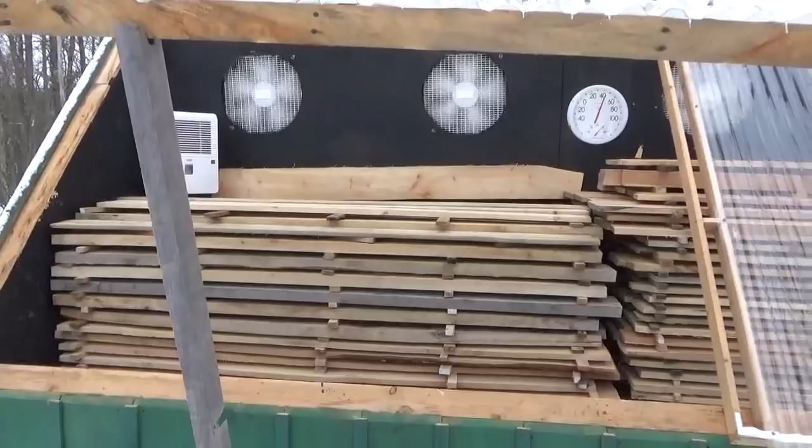Now the side that I have open here, this was maple. It still is maple, but I mean it's maple that was sitting outside all summer last year, and the moisture content of it was about 19% for the longest time. So we're going to check and see what it is right now.

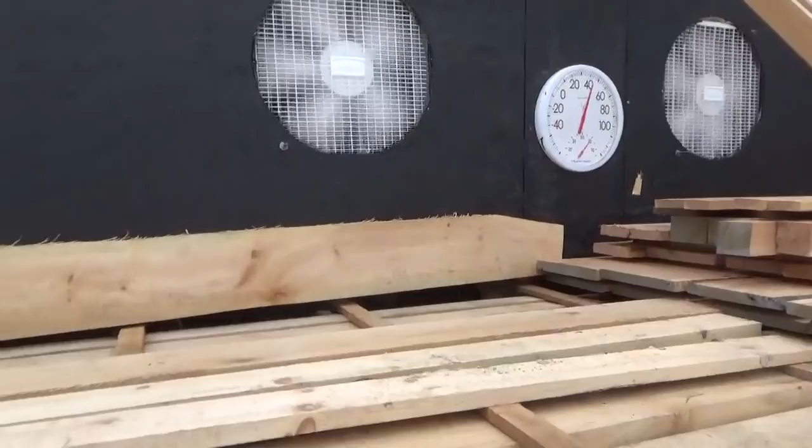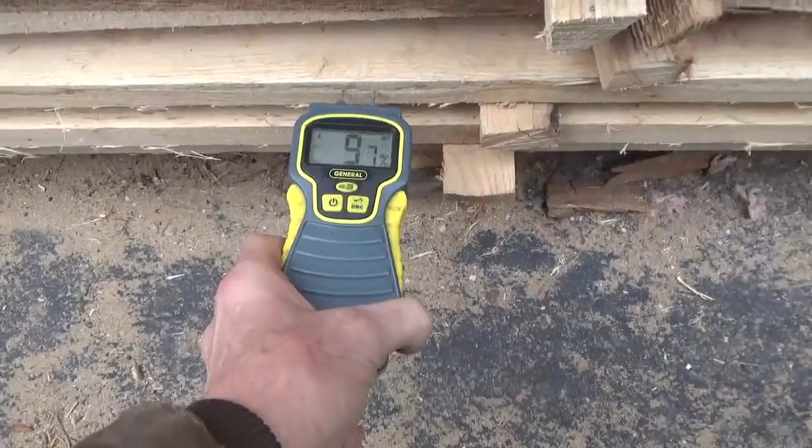So I'm starting about halfway down the pile. You're looking 11% there, 12%. 9%, and this is all maple. 11, 10%, 11%. This is pine, 2 pine boards that I put up here. It's 13%. Some red oak down at the bottom here, 9%. So the kiln has done very well holding its own, despite the cooler temperatures in here.

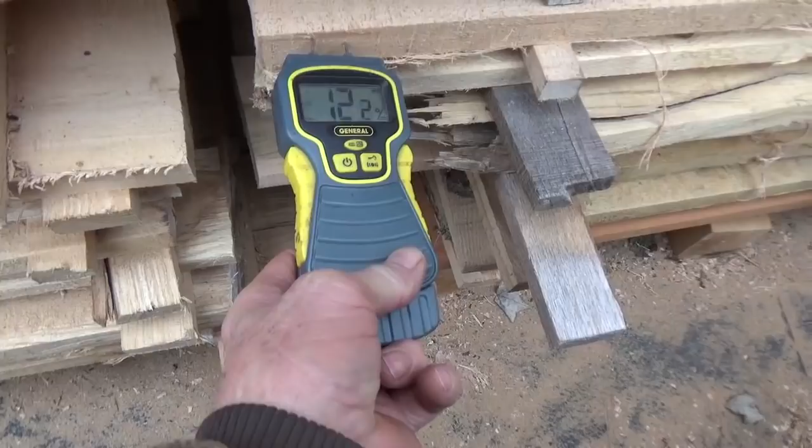I want to check some of this stuff on this side. This is cherry. Yeah, we'll go down near the bottom here. The cherry's around 10. 9. 12%. 8% for the hardwood part of the cherry, or the heartwood, 11%.

So you can see that even though the temperature is not that warm and the relative humidity there is claiming to be really high, and it is probably that just because the temperature is allowing for less moisture. The moisture is being compressed inside of the cold temperature, and that's why it's reading such a high relative humidity. But anyway, the lumber is still drying good. I have nothing to worry about here.

I would say that as far as it going all the way down to 7% or 6%, which is where I would like it to be, it's probably going to hang in there somewhere between 8 to 12, until I can get some really warm temperatures in there. That's the biggest problem right now. So right at this point, I'm just maintaining what I've got here.

So if you're into building yourself a solar kiln, however you build it, it doesn't have to be like this naturally, but make sure you leave yourself room to get in at your wood, because otherwise you're just killing yourself trying to load it. But yeah, if you're into building a kiln for yourself, these do work very well. They're on the, I think it's Virginia Tech website. You can get some information on this thing, and they really work good. And as far as I'm concerned, it was well worth the effort.

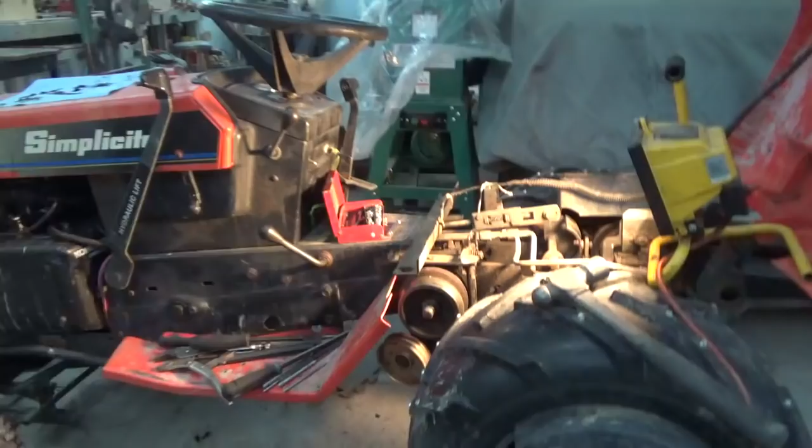Hey YouTube. So, it's always something. This Simplicity tractor, which seemed to have been running so well, all of a sudden started crunching and grinding, and I took the bevel gearbox cover off, and there's a whole pile of metal filings in there, which I think are gear teeth. But anyway, I'm making this video just for myself, if nothing else.

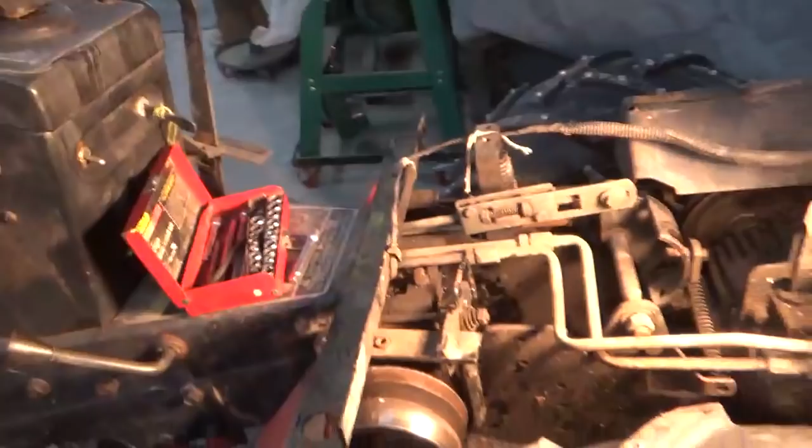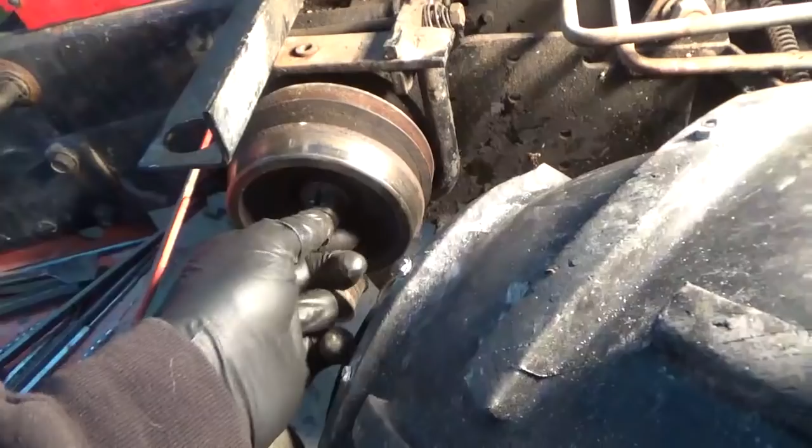On this adjustment to get the thing to engage, I took one nut off of here. There's another nut and a spring. I want to see if I can't pull these pulleys off this shaft so I know what's holding this shaft. There was a keyway in here I took out. There was also a round ring.

There it is right there. That was helping to hold on the pulleys. So at this point I'm just trying to see if this whole pulley mechanism will come off of here. I don't know if it will or not.

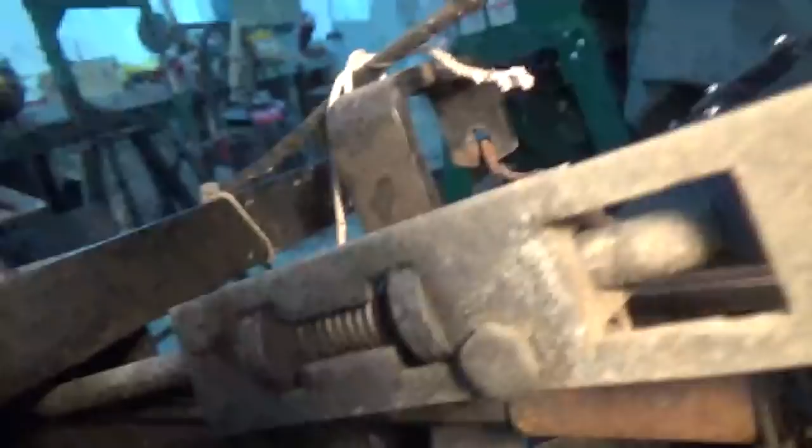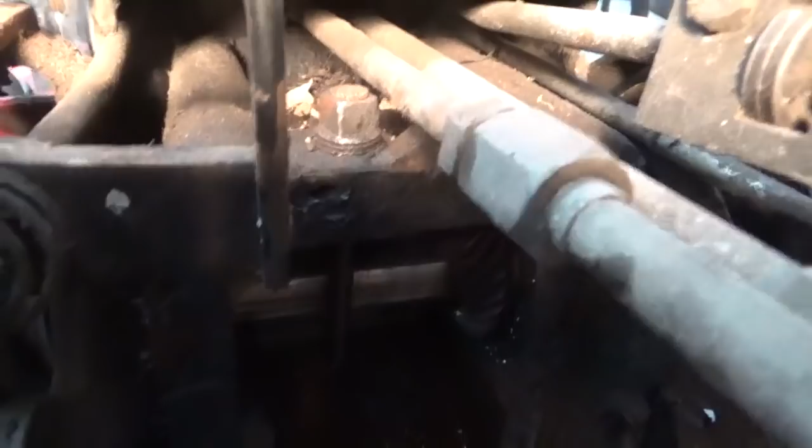So I don't know if you can see down into that gearbox too well. You can see there's a gear on this side. I don't think there's any on the other side, but there's like one in the front there, sort of like a pinion gear, and I think that's the one that's all messed up. So I got to take this apart and look at it. I can't tell anything from the way it is here.

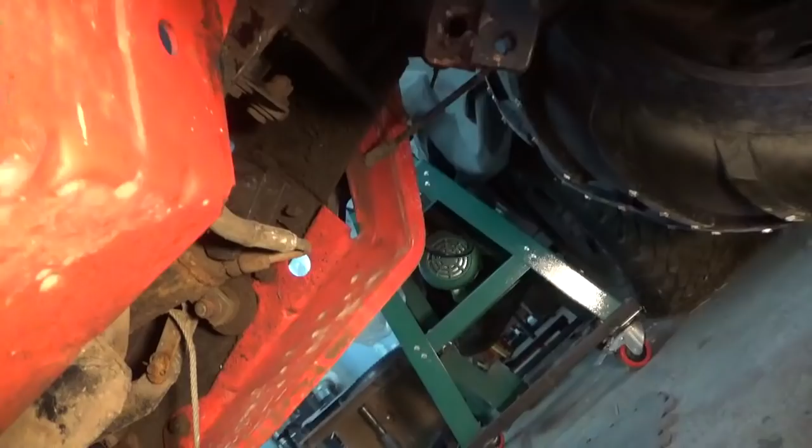So the next thing I did was I took this bolt out of here that goes from the bottom of the tractor there onto this tab that's on like an angle. I don't know why it's on an angle, I guess to divert the belt to a different direction, but either way I need to get this pulley off of here, so I'm trying to see how that happens.

From what I can tell, it looks like if I take this nut here off, I should be able to get that off of there. I'm not certain of that, but that's where I'm headed next.

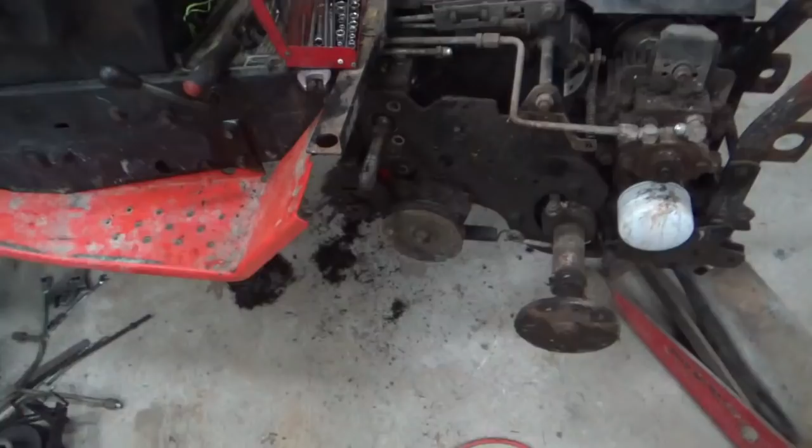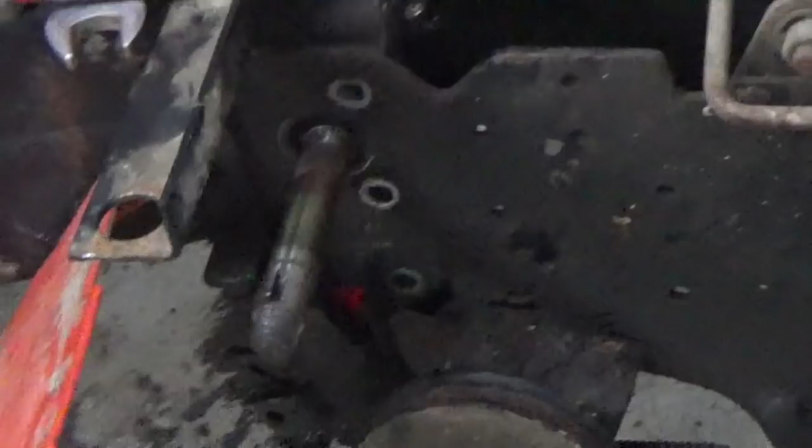Okay, well here's the status. I had to take the weight and the tire off of this side in order to get this. It's kind of like a clutch type of thing. It turns like an old style clutch and a yoke, and it pushes the gear into a brake lining to make the gear spin. But that all had to come off that shaft, and I took 3 bolts, 1, 2, 3, out of the cover there, and it looks like it's coming loose.

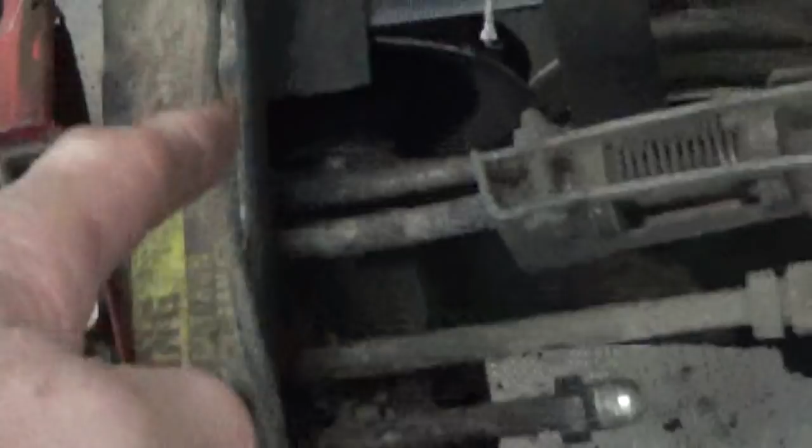I have to take the little drive shaft off that comes back there to that bevel gearbox, and then on the opposite side there I need to take this pulley off of here. I'm going to take this cover off because I think I can get at the belt that drives that pulley on this side that I need to take off. So I'll take that off of there and then see what I can do with that belt, and then I want to get that pulley off the other side.

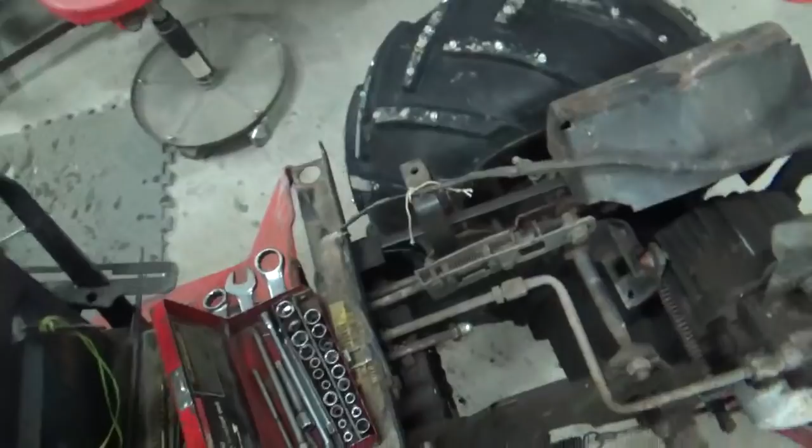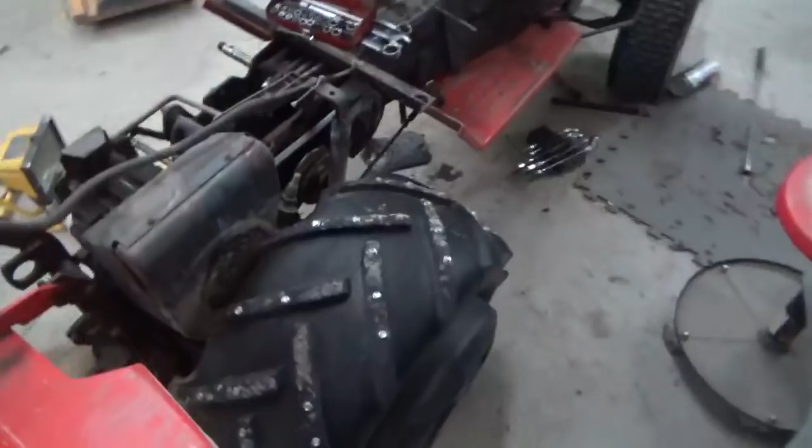It's not something like I'm used to working on, but nonetheless, you start taking bolts out and you'll find out what comes apart. Not sure if I'm doing this the right way yet, but this is how I'm going to do it. So, you live and learn. I want to take this off like I said and then go from there.

I'll tell you what guys, you ought to try and get your stuff in as good a shape as you can get it, especially once you hit your early 60s, I would say, at least for my case. The best thing you can do is have stuff fixed up and treat it good so you don't have to be doing this kind of work. Right now my leg is killing me trying to work underneath this thing and work around it. But you know, it's just something that has to be done, so you do it.

But what I'm saying is that's part of the reason why I bought this truck and leave it sit, so that when the time comes I don't have to do nothing to drive it when I get to my older age, when the other trucks maybe need some work. So I'm just hoping that works out for me, my little plan.

But anyway, I'll be working on this probably tomorrow now, so I'm not going to be doing nothing else with it tonight. I took that cover off over there, and that's it for now.

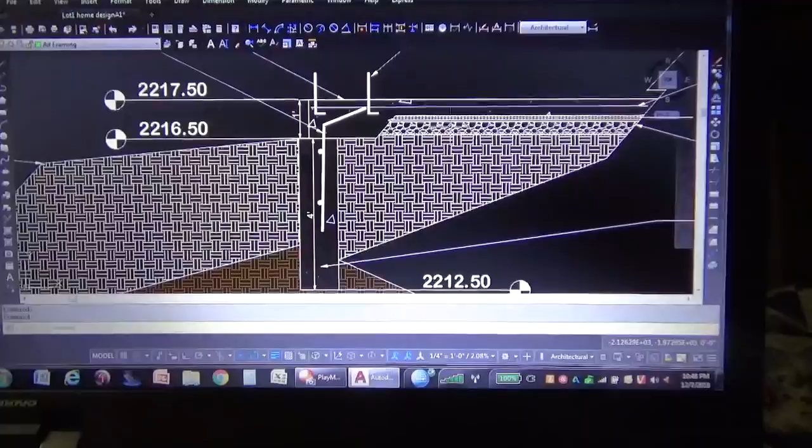So what you're looking at here, this area here represents the drawing symbols for dirt. Now this up in here is stone, and then this represents insulation. So now this doesn't show the insulation coming down here and meeting this, but that's what it did do. And then like I said, we would put insulation in the front of this concrete to seal that.

But I had been asked a couple of questions and I want to answer them. This is the concrete. This little triangle and the specks you see there represent concrete.

Now there is, some people call it visqueen, some people call it plastic, but 6 mil plastic runs here, down, and to the form board. Okay, and the form board would actually be, let's see here, right here is where the form board would be. So this is all concrete in here.

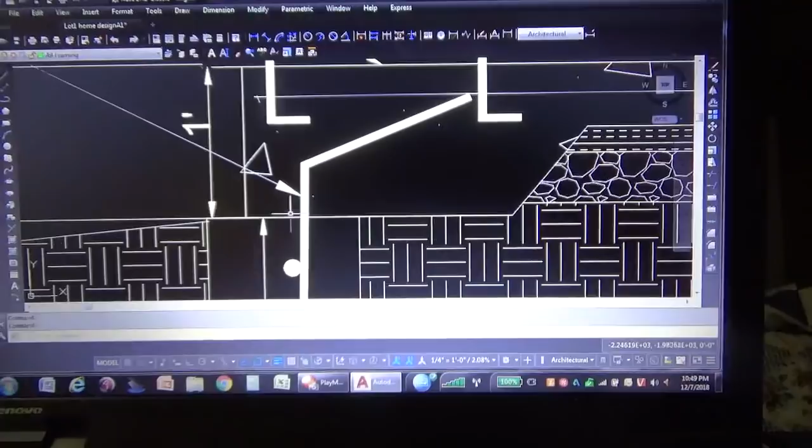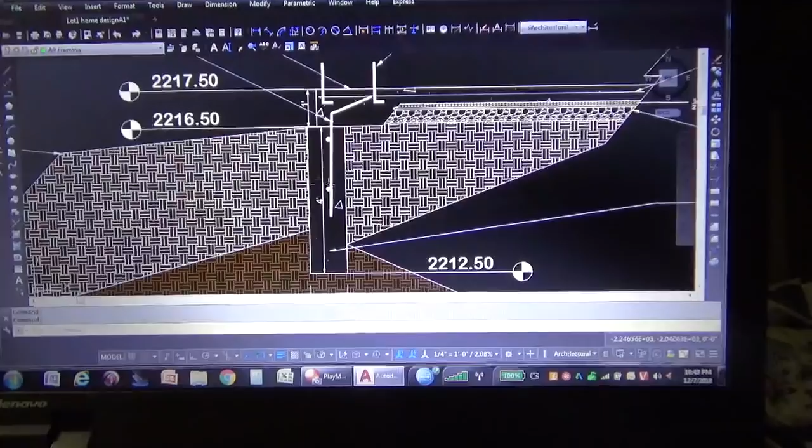Now, if you remember, I had said that down in the foundation where the concrete is, in the foundation wall, I also had rebar. Now this rebar doesn't show it, but this actually extended down and was driven into the ground to help hold it there. And then these bars were tied horizontally across from one bar linking to the other. That's what you're seeing there with this small bar.

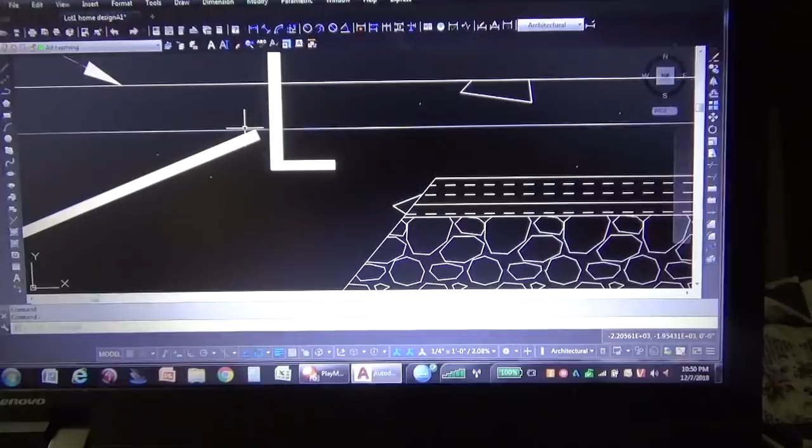So what I did with these is I left these stick up far enough so that they could be bent and hit the 10 gauge mesh, which is right here, and then this mesh was welded to these rebar, or you can tie the mesh to it. It doesn't really matter. I welded it because I was doing some welding that day for something and I had the welder on the truck, so I just used it.

Also, this represents the anchor bolts. After you pour the concrete, you can put the anchor bolts in, and you want to measure and try and get the anchor bolts so they're not going to be in the center of studs or window jacks, or in door jambs. You don't want that. But anyway, this would represent the anchor bolt.

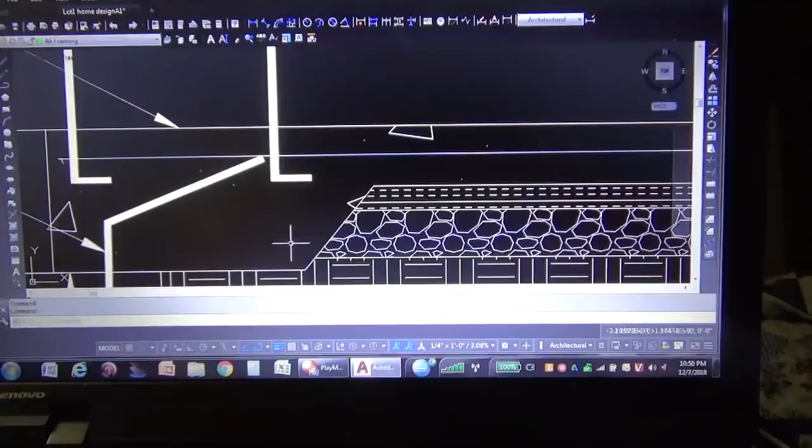So the insulation would come over, down. There would be plastic on top of the insulation, okay, and then you pour the concrete. And it's important that this mesh come across this gap here. This concrete is weakest right at this point here, okay, and if you don't have a good compacted fill underneath that and compacted stone, you could end up with a crack here.

Now I have never had any cracks in the floor along this edge, and that's mainly because it's been compacted so hard. Because once you compact this soil and you dig this up here, the only place you may have a little bit of breakout with the soil is right in these corners as you're pulling the bucket out loaded with dirt.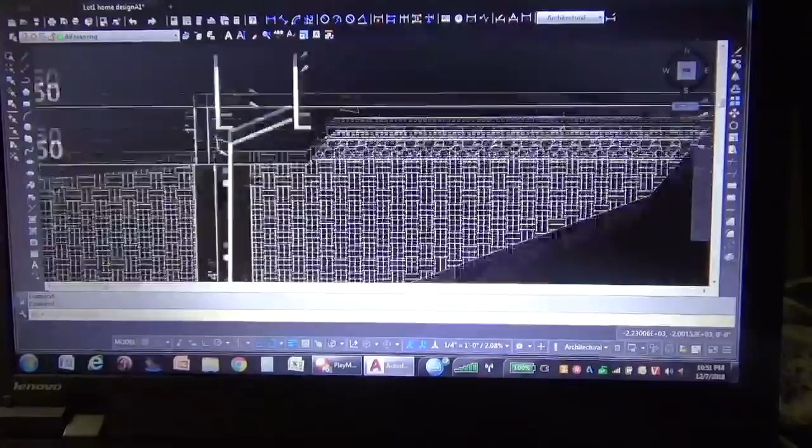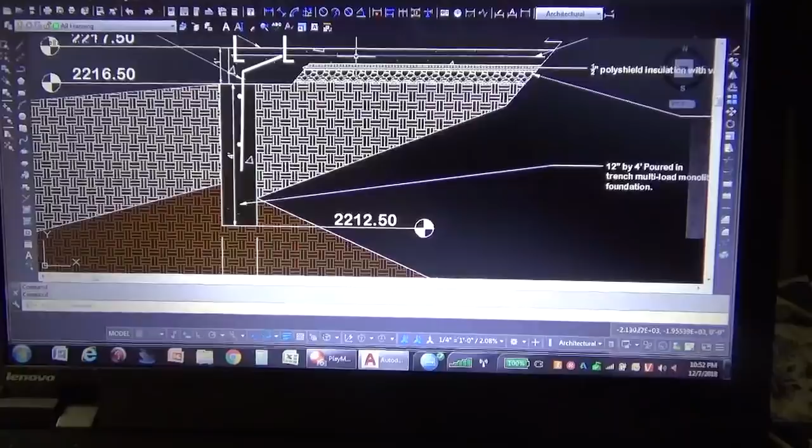So the best thing to do is to dig the trench for the foundation. That would be this section here. Pour that entire thing with the rebar in it, and leave the rebar long, like maybe 2.5 feet long, so that you can bend it and stretch it to reach the 10 gauge mesh, and that'll hold this thing together for you. You could bring this rebar, if you wanted to, way out into here. That's up to you. It would work out good to be able to do that, so that's not really an issue.

Yeah, so there is crushed stone under there. That was one of the questions, and it depends on how much. Let's say the dirt you're using is something like a sandy clay that's dry enough to get good compaction, you can get it pretty flat.

But if you're using something like shale or a bonier material, meaning that there's bigger rocks in it, you might not be able to get it nice and flat without rolling it. A plate tamper is not hard enough to compact that. I would use a jumping jack or a roller. Actually get a small roller in there. But either way, you want to try and get this looking like where the concrete's going to be. So whatever the shape, this should be nice and level.

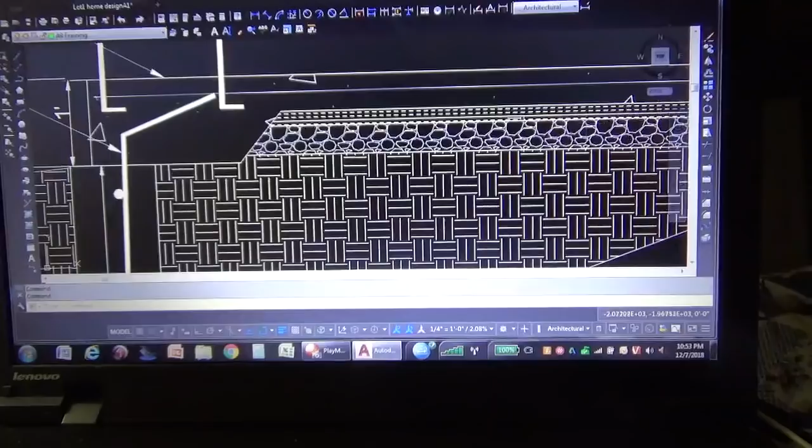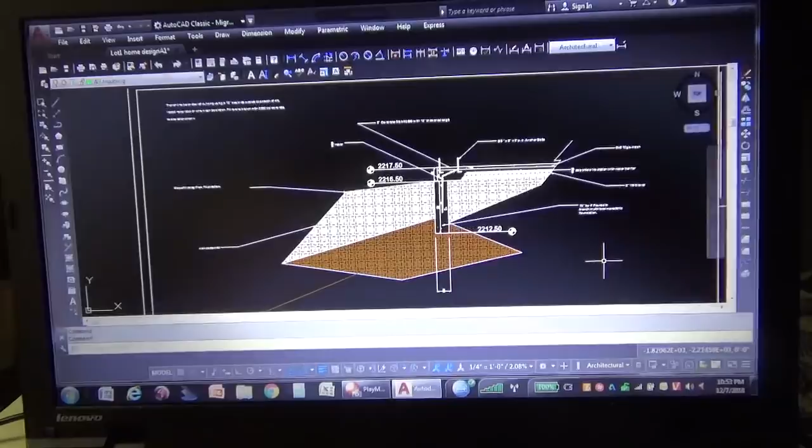When you lay the insulation down on top of it, it should be laying pretty much flat and touching all the way along here. So anyway, I think that answers the questions that I was asked the other day about this particular design here. I like this design. This design works well. This was from an actual drawing that I had gotten approved. And you can see that the elevation of the floor here is at 2217.50.

So that's how I go figuring all that out. 5/8 inch anchor bolts, 5 foot on center. These are 8 inches long. Now you can put any length you want in there. You can put a longer length in there if you're worried about tear out, but on a house you don't really have that problem.

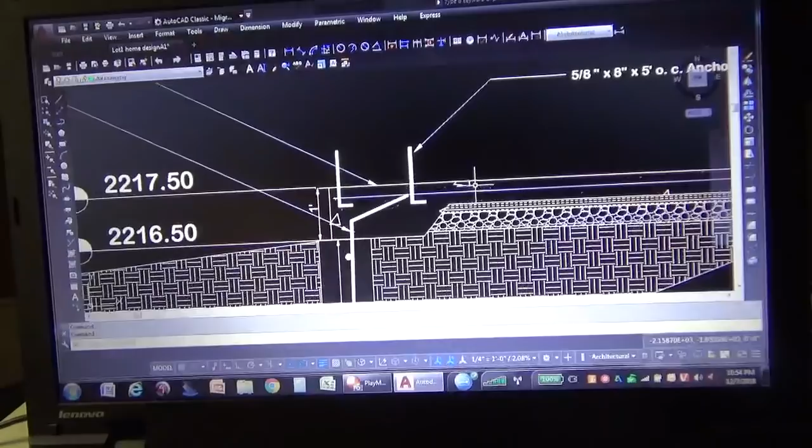Now, if you know anything about framing around concrete, if you put the anchor bolts in first and then you have to stand the wall on top of the anchor bolts, that can be troublesome, especially if you have only a couple of carpenters and you're trying to pick these walls up and they have the sheathing and everything on them. It can be very tough.

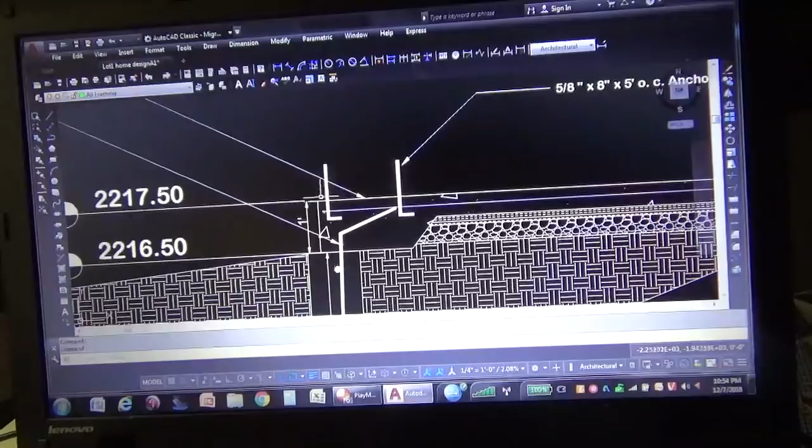So what I do is I invented a hinge that actually lays flat in the concrete. It goes into the concrete on an angle, like say right here. I'll draw this for you. It goes into the concrete on an angle. Therefore, it has a good amount of bearing, and then it lays flat. Let me just draw this in here.

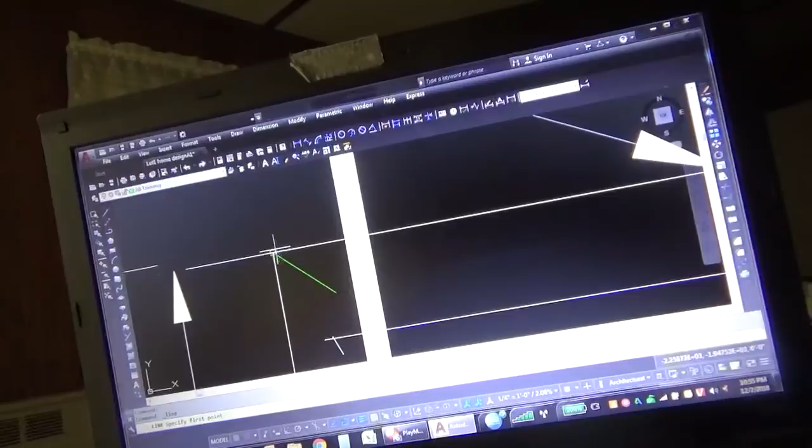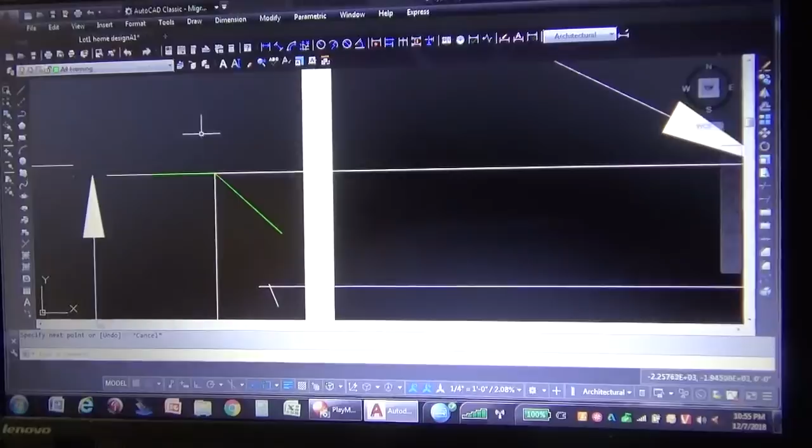It lays flat along here, and there's a hinge pin in it, so that when you finish the concrete with something like a power trowel, all you have to do is power trowel right over top of this plate. It's not that thick. It's about the same thickness as a bracket, like a hurricane bracket. So then when the concrete's hard and you strip the form off, you just take this and bend it up and around the plate of your framework.

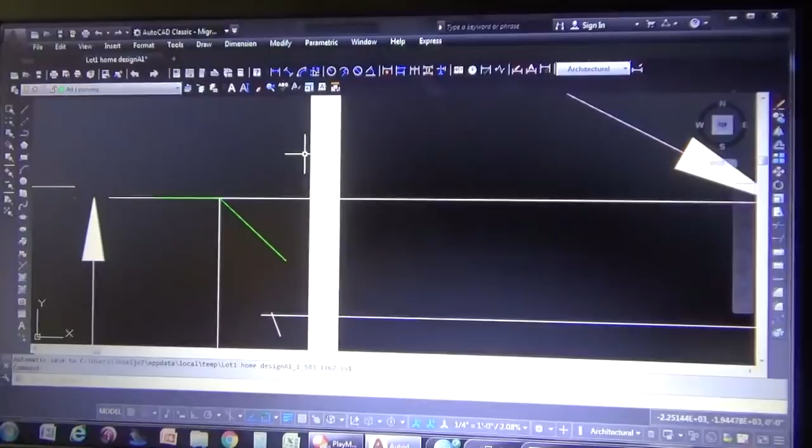Sometime I'll show you that in a different way, because it really works good. It's just as tight as the anchor bolts can be, because you're bending it down to pull the board down, and then you nail it in place. I like it, and it works good, especially for this area. Now I don't know if it would conform to something in a very, very high wind area, but it worked for me. And I built my garage with this thing. That's when I first invented that. But I'll show that to you sometime later.

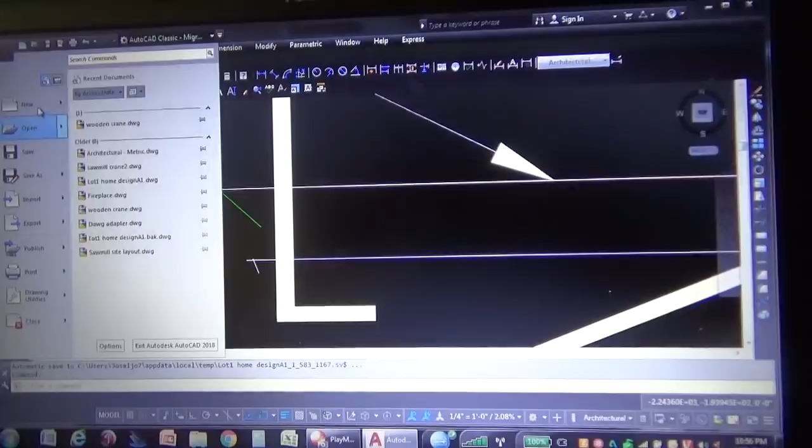The other question I was asked, let's see if we can get another drawing here, a new drawing. The other question I was asked was, let me just go back here a second.

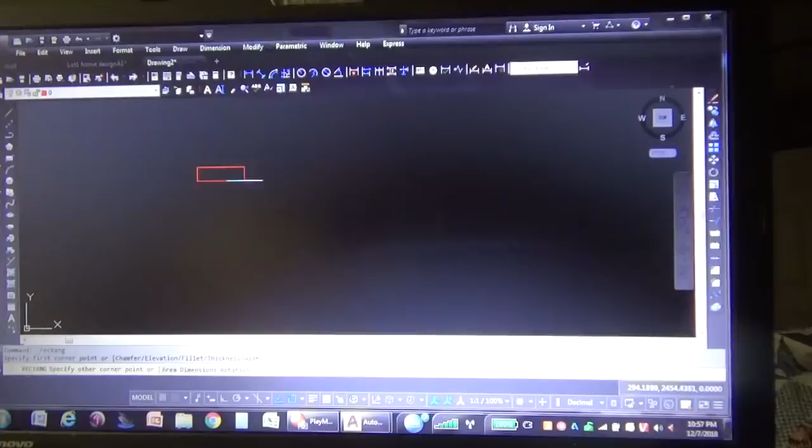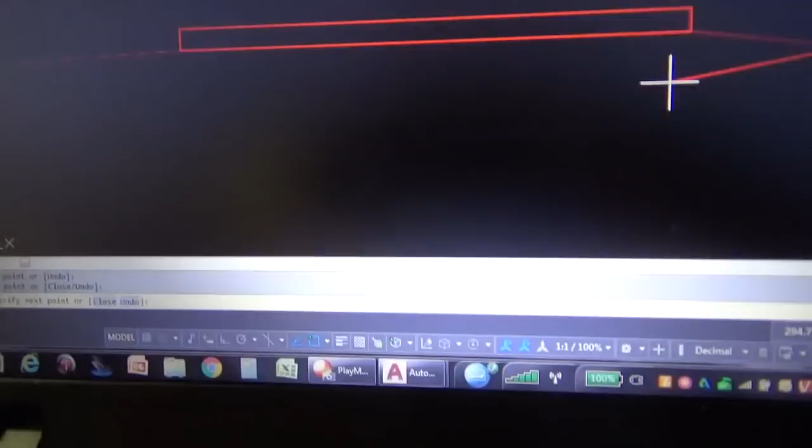Okay, so the other question I was asked is, can you put insulation under a slab that is actually poured on grade? Now, this is where you don't have a problem with frost, okay? So let's say you graded that off a little bit and you're going to build yourself a shed or a garage or whatever you want on this. It's hard drawing with one hand. But anyway, yes, you can put insulation under this.

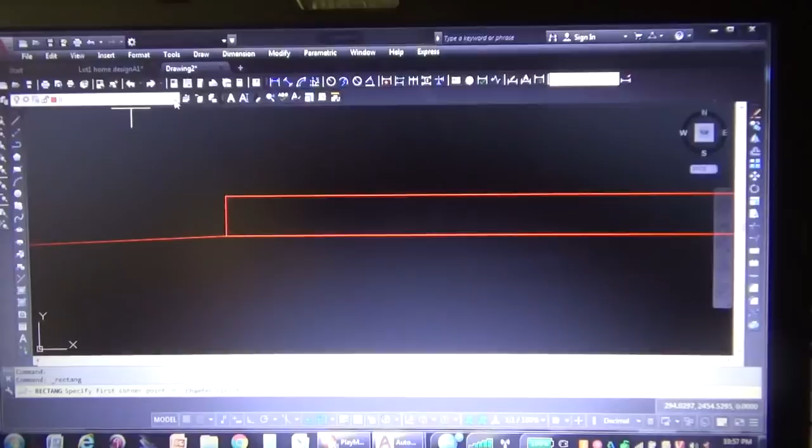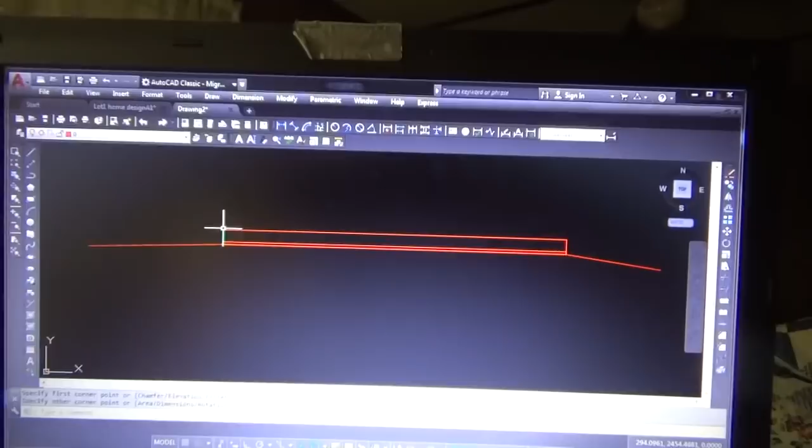In fact, I've done this in my greenhouse. So what I did was I graded the ground level off, and then I put insulation underneath here. Now it just so happens that the entire floor is insulated. So then when I put the walls up, you can still see there's some concrete here. I don't have the vinyl and insulation on the edge, on the greenhouse I mean. Not the garage, the greenhouse.

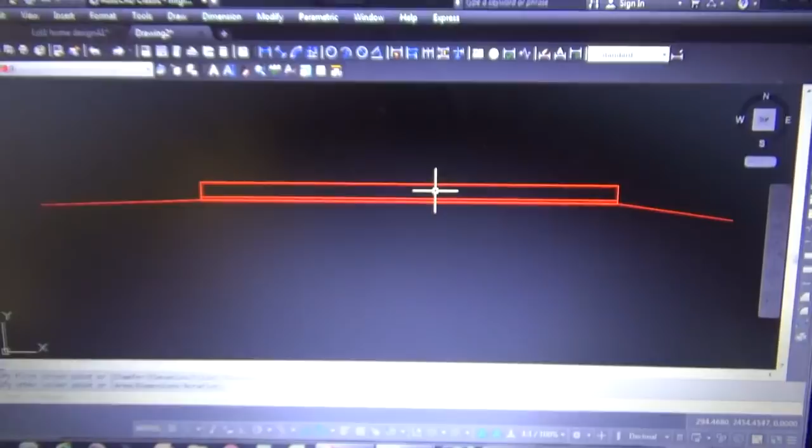And the greenhouse gets so hot in there, and it's not where you need to heat it in the winter. We're trying to retain heat in the summer, and the concrete slab does that. But if I hadn't insulated this, it would always get cooler every night and lose a lot of heat through the floor as well as out through the sides here. So putting insulation underneath the floor after you form it out is a good idea.

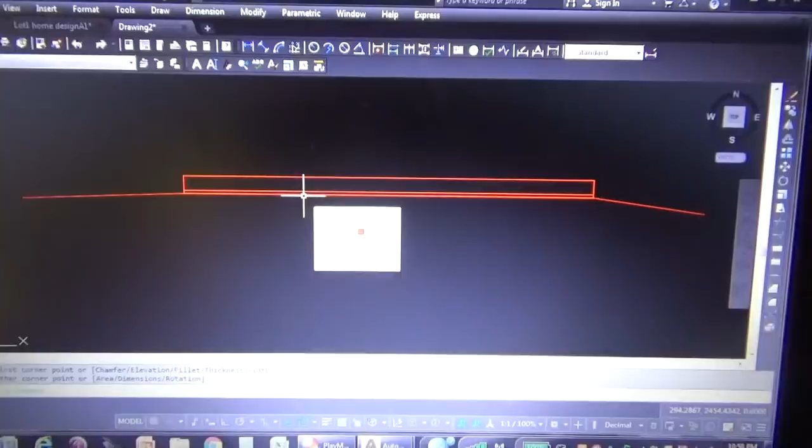And I would also put plastic underneath that. It'll help to keep moisture from coming through the concrete, which, depending upon where you're at, the concrete can split once there's moisture in it. It could crack in the wintertime. Now this is something that I don't normally do up in Pennsylvania. However, let me just say this.

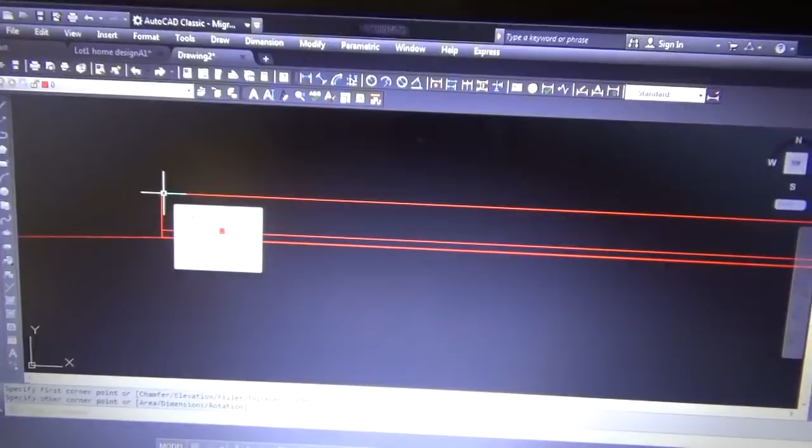I found out that just like with my sawmill, you can pour a 24-foot long slab, as long as you make it 6 inches thick and you don't go any wider than about 12 or 16 feet wide. So in other words, you're pouring a slab. As long as it's 24 here and not more than 16 there, with 10 gauge mesh, maybe a little rebar thrown in for extra credit, and then the insulation underneath that, this thing will not crack.

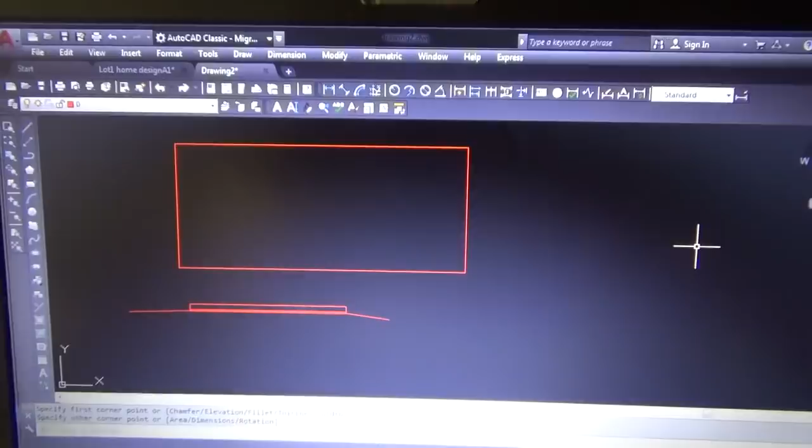My greenhouse has no cracks on the floor whatsoever, and that's known as a floating slab. One of the commenters had said a raft slab, and I'm assuming that he meant a floating slab. I've never heard the term raft before, but that doesn't matter. I'm just saying I think that this is what he was talking about.

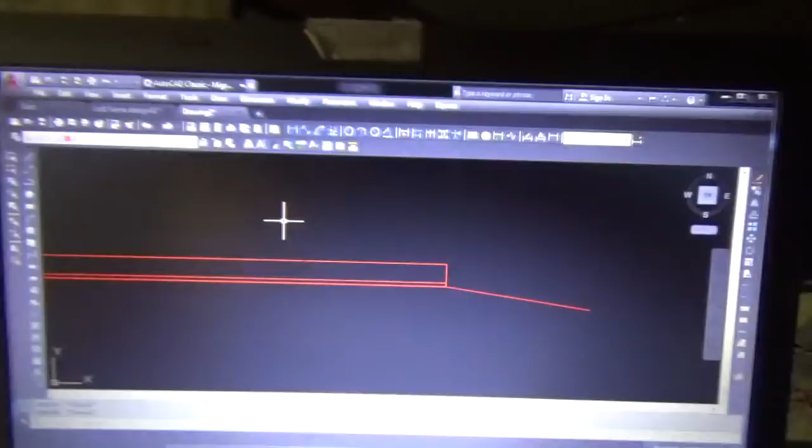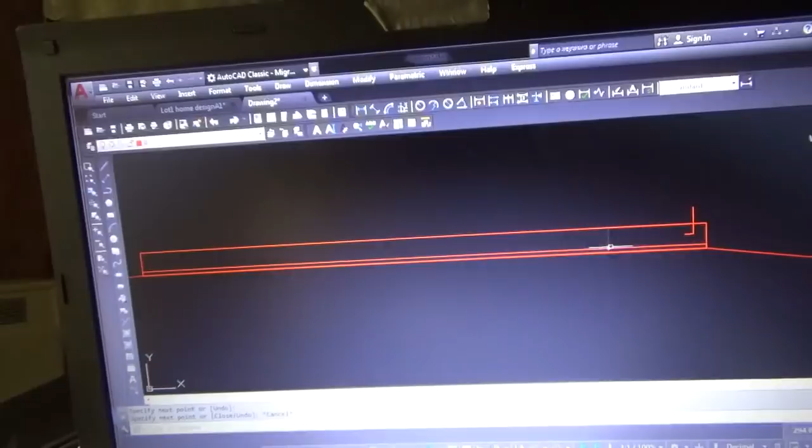So yeah, you can build that, and then you'd go ahead and put your anchor bolts inside here. Oh, I'm grabbing the wrong things here. You'd put your anchor bolts inside here, and go ahead and build your walls however you want to. So there's not a lot to this. This is probably the absolute cheapest way to go. But even with this, you should still spend money on stone and put stone underneath here.

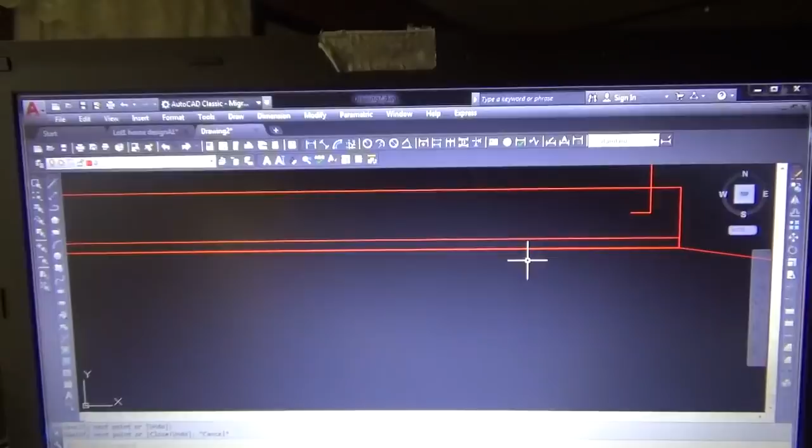Now the stone that should be underneath here is different than the stone that's underneath the house floor, because this is a floating slab and it's going to be moving. It's not going to move all over the place, but it will move. Because this is a floating slab, you're going to want to keep water from being underneath there. So you want to put 2B stone in there, or washed stone, just so that it's clean stone, that there's no dirt in between the stone. It's just clean stone.

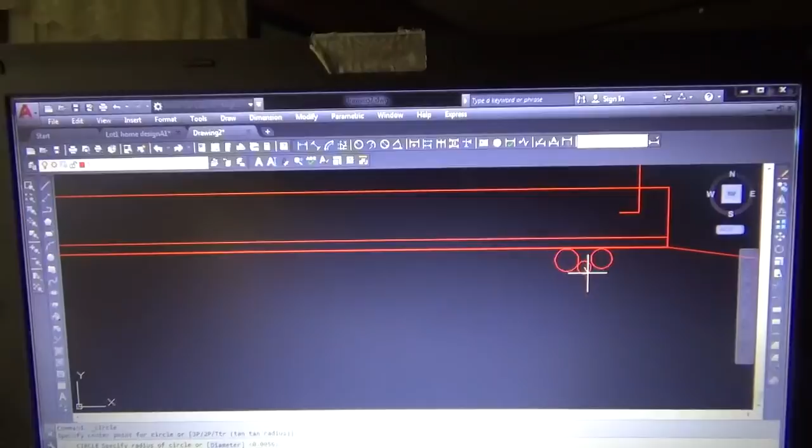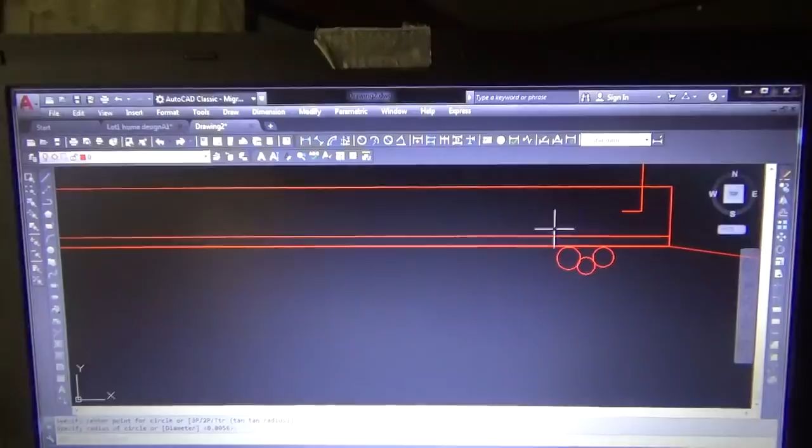And then you grade that off as best you can. I found that if you use this type of stone, this stone will not freeze. As long as you have it a little high, just like this is showing you, we're a little bit high here from ground level, the water will run off. This will not freeze in here, and then the slab won't crack. It won't heave in any one particular spot. So that's something you want to watch out for.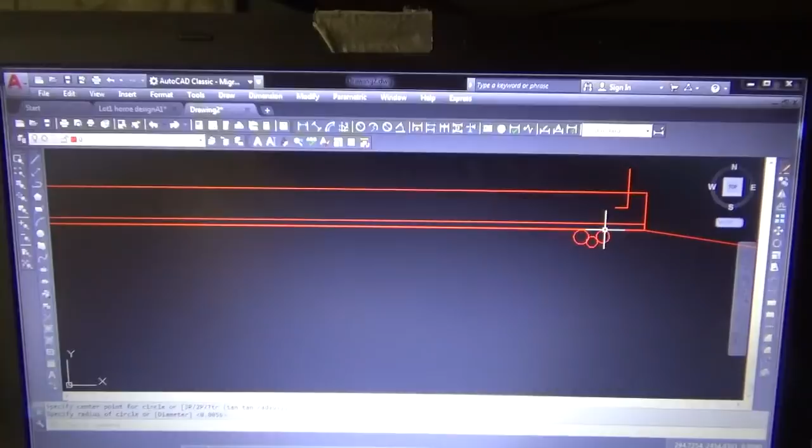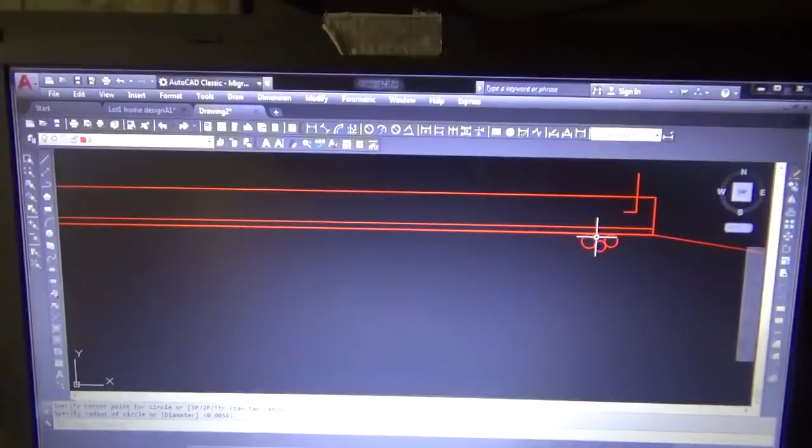In other words, like here where you're above one stone or the other, you don't get quite the same bearing, especially once you put the insulation over that, because the concrete does not conform to the stone now, it's conforming to the insulation. So with the weight of this, you're pushing on some of these sharp edges, which are going to go into the insulation. But you could cap this. You could put 2B stone underneath, 4 inches thick, and then cap this with lighter screenings or something to get a nice smooth finish. The important thing with concrete is to have a nice smooth finish underneath the concrete work.

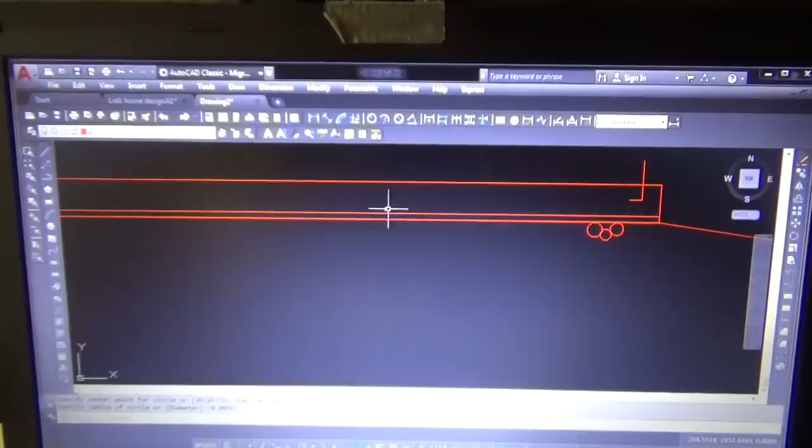Now, this may sound like it's going a little bit too far, having the subgrade look the same as the finished product. If you don't want to do it, then don't do it. But I'm telling you from my experience that the more you make this subgrade look like this finish, the better off you're going to be, because you're going to get more support, less cracking, if any, and it's going to just be a better job. So that's my advice, but you don't have to take it. Do what you want. I'm just saying that's one thing that I do.

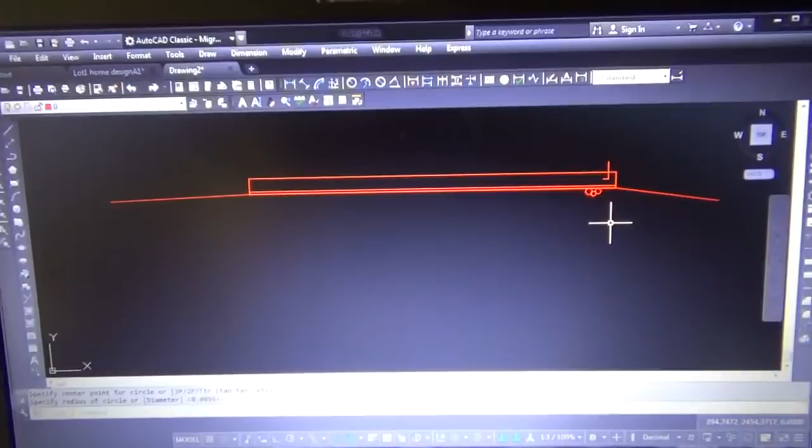So I'm going to go over some of these other building things that I have and show you some of the stuff that I've come up with over the years to make these things really work nice and make it easy for one person or two people to do these jobs without killing yourself. When I had crews of guys working, it was different than when you're trying to work by yourself. Finishing off a concrete slab that's 12 by 12 when you're 64 or 65 years old can be very hard on you, especially if you want it to be nice.